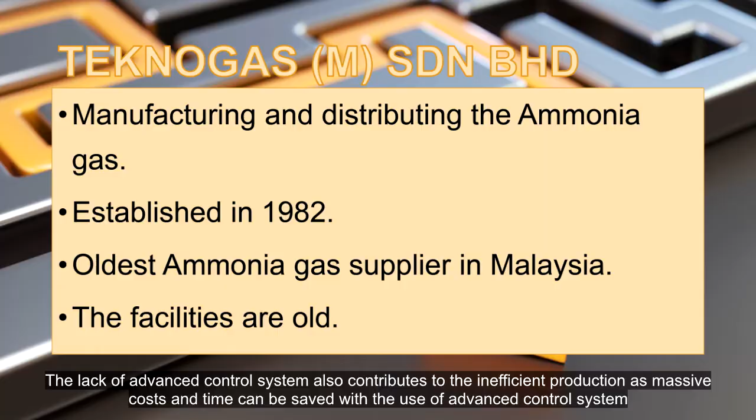However, this video will be focusing on the company's ammonia storage tank. Storage tank is considered as one of the most crucial equipment as the end product is kept and stored in the storage tank for a period of time. The control engineering department suggested the company to do a replacement of old storage tanks with a new one. There are several reasons why the replacement should be done by the company.

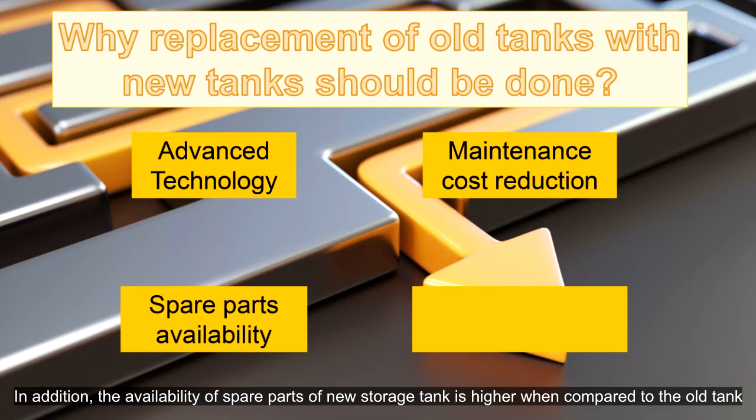Firstly, this replacement will ensure the company has the most advanced technology. The maintenance cost will be reduced as the value of desired operational condition parameters like temperature, pressure and flow rate can be redesigned. In addition, the availability of spare parts of the new storage tank is higher when compared to the old tank. Furthermore, the new proposed tank is more environmentally friendly as it produces less pollution and waste.

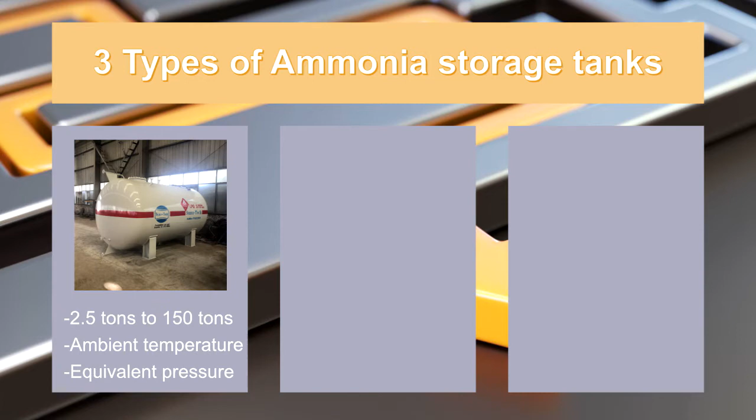The Control Engineering Department has shortlisted 3 types of ammonia storage tanks. The first one is the smallest one as it can only store 2.5 tons to 150 tons of ammonia. This storage tank operates under ambient temperature and equivalent pressure. The second storage tank is the medium-sized storage tank that is applicable to keep 500 tons to 3000 tons of ammonia. This spherical-shaped storage tank requires a refrigerator system as ammonia will be kept under pressure.

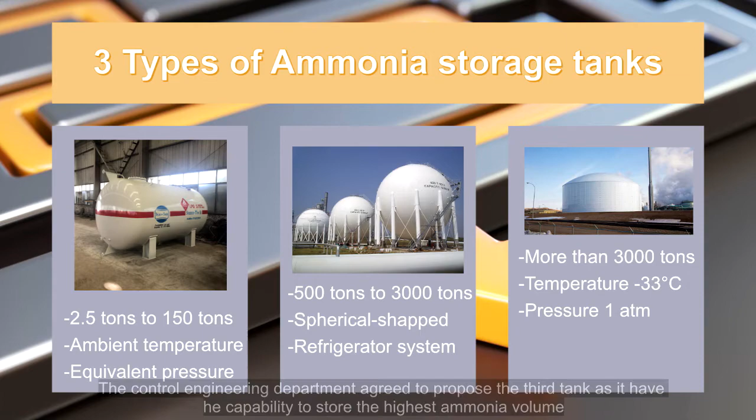And the third tank is the biggest ammonia storage tank that is suitable to store produced ammonia of more than 3000 tons. A refrigerator system will be used to reduce the ammonia temperature to -33 degrees Celsius. This storage tank will be operated under atmospheric pressure. The Control Engineering Department agreed to propose the third tank as it has the capability to store the highest ammonia volume. The biggest storage tank, which is the third tank, is required as the company produces a huge amount of ammonia.

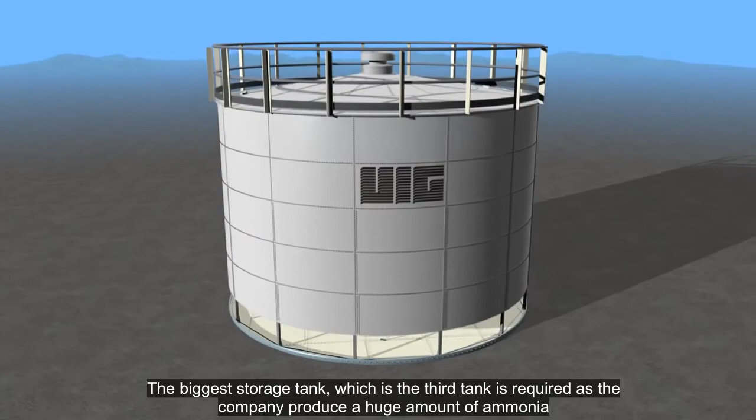And now, I will be presenting part 1, variables involved. In this part, we are going to discuss the variables involved in the storage tank. The operational condition of the storage tank needs to be properly controlled as we do not want any negative changes to happen to the end product. There are 3 variables that we need to control in the storage tank, which are temperature, pressure, and flow rate and level. So the first one is temperature.

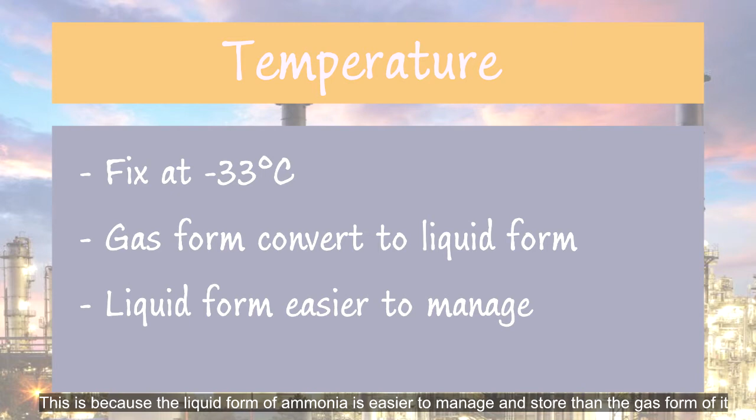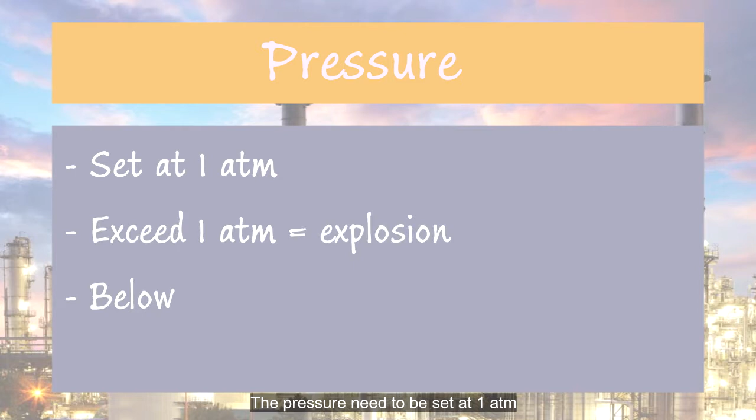The temperature needs to be fixed at -33 degrees Celsius. This temperature is required as the ammonia in the form of gas will be converted into the liquid form. This is because the liquid form of ammonia is easier to manage and store than the gas form of it. The next variable that needs to be controlled is pressure. The pressure needs to be set at 1 atm. This control is crucial as an explosion can occur if the pressure exceeds 1 atm. If the pressure is below 1 atm, the ammonia will be vaporized.

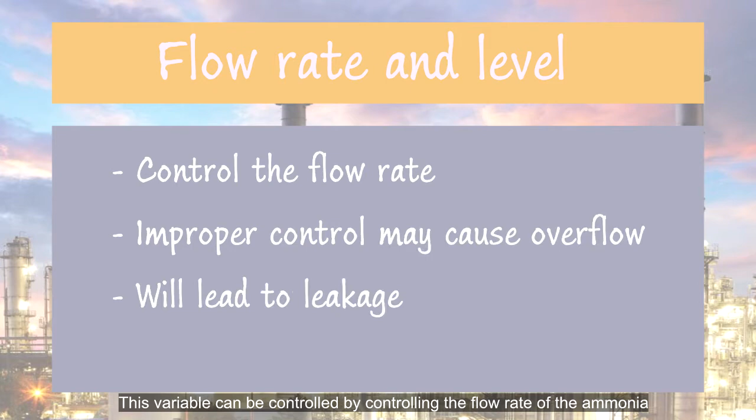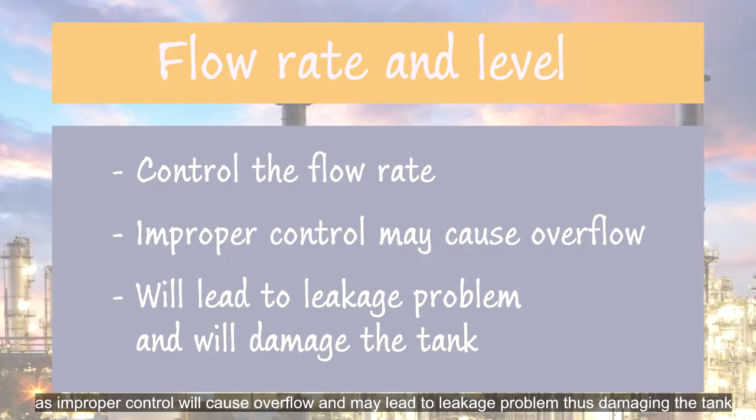And lastly, the level of the ammonia in the storage tank. This variable can be controlled by controlling the flow rate of the ammonia. The control of the level of ammonia in the storage tank is vital, as improper control will cause overflow and may lead to leakage problems, thus damaging the tank. So how to control these parameters to be at the desired value will be further explained in the next part by Luqman.

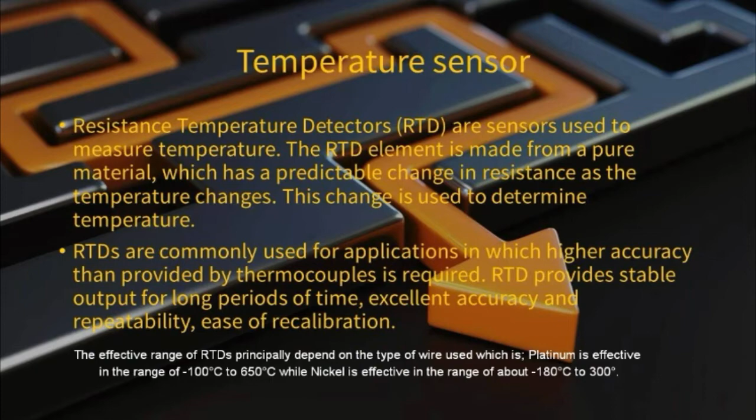The second input device is the pressure sensor. Sealed tanks such as ammonia storage tanks are required to be sealed from the atmosphere. Under this condition, a differential pressure gauge should be used to calculate the difference in pressure. But due to the corrosive nature of ammonia, it should be protected by a material that is suitable for ammonia use. The pressure gauge should also be able to withstand the pressure.

The suitable pressure sensor for ammonia is the digital bellows sensor. It is sealed at one end with a small hole at the other. When pressure is applied via the hole, the bellows expand. This displacement can be calibrated in terms of pressure. The electrical output signal is directly related to the displacement input signal.

The third input device is the volume meter. Pure ammonia is stored in a pressure vessel rated to 250 to 300 psig. Aqueous ammonia, 70% to 80% water, is stored in a tank rated for 25 to 30 psig. Storage requirements for aqueous ammonia are 3 to 4 times that of pure ammonia. A level measurement device for ammonia storage tanks must be able to withstand pressure and still measure accurately.

Plus, the surface of the fluid tends to boil as it moves between states, and heavy vapors can affect measurement accuracy. Radar-based sensors, on the other hand, are ideal because low-frequency radar devices are less prone to attenuation and better suited to many ammonia applications.

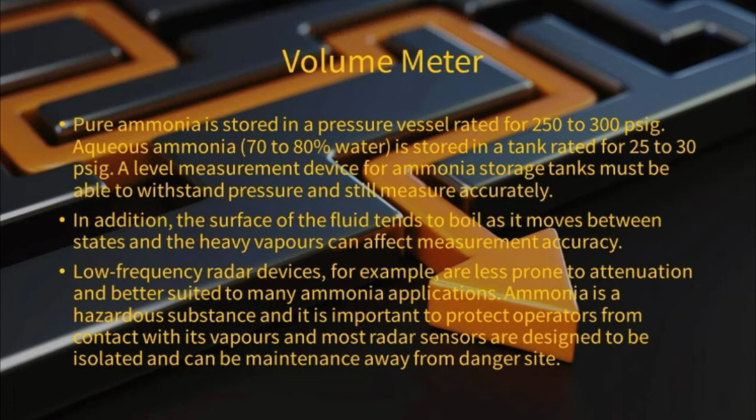Ammonia is a hazardous substance, and it is important to protect operators from contact with its vapors. Most radar sensors are designed to be isolated and can be maintained away from danger sites.

Now we will move to the last part, which will also conclude our assessment. This part will discuss the system that we have chosen for our company. We need to bear in mind that we are buying a new storage tank for our company. It is important to get a tank that can store ammonia liquid in a condition that will not harm the surroundings and worker safety. As we all know, it can cause explosion without proper storage.

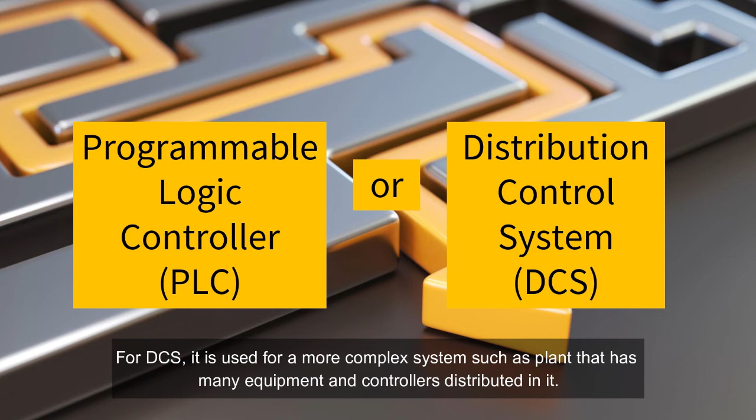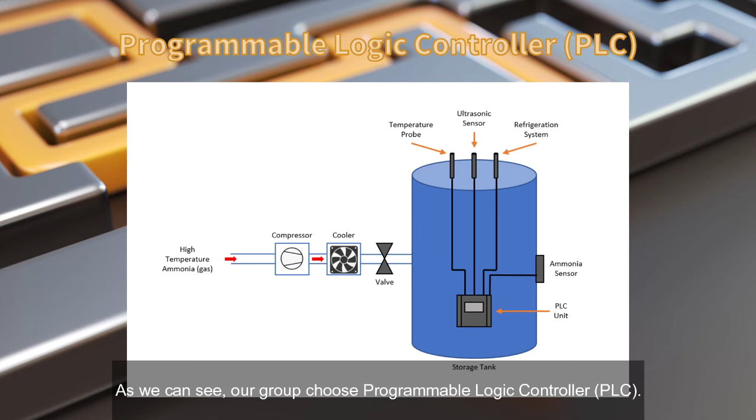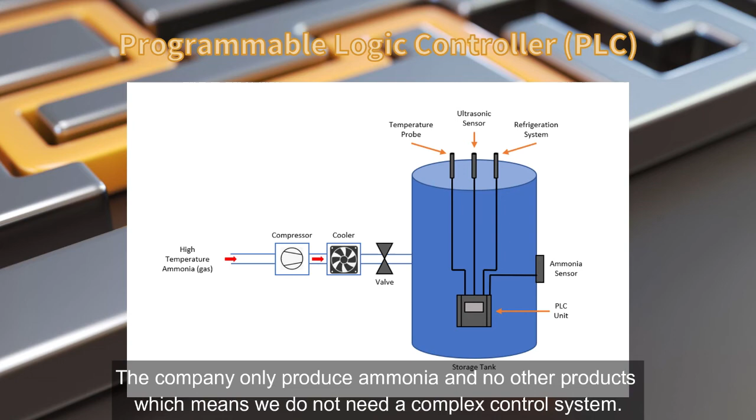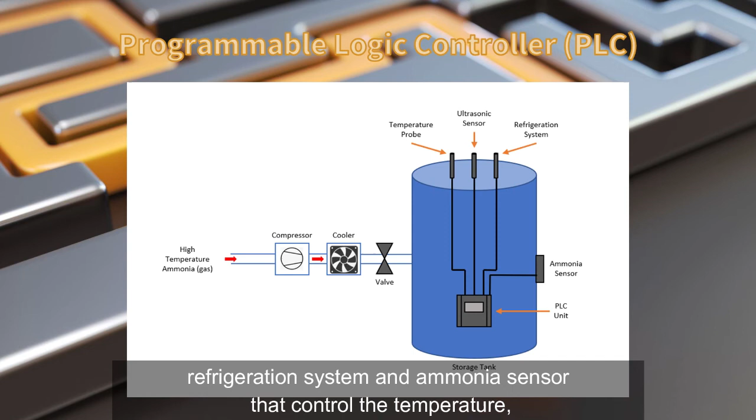As we can see, our group chose the Programmable Logic Controller (PLC). The reason behind this choice is that our company has a simple and easy-access plant. The company only produces ammonia and no other products, which means we do not need a complex control system. There are four devices attached to the storage tank: temperature probe, ultrasonic sensor, refrigeration system, and ammonia sensor, which control the temperature, level, leak detection, and cooling purpose respectively.

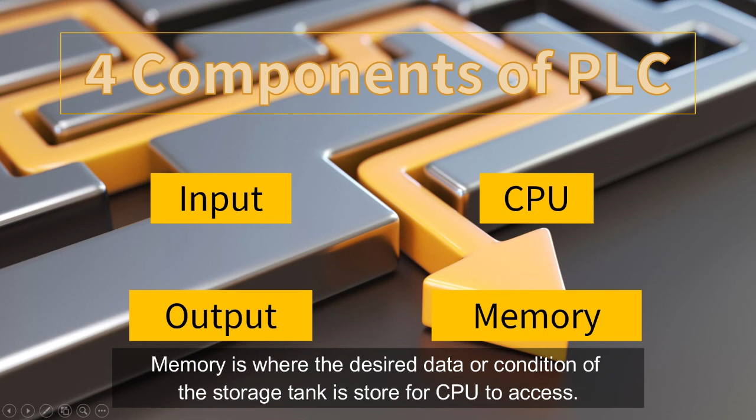Now we will go further into PLC. There are four main components in PLC: input, CPU, output, and memory. Input represents the sensing devices that will sense any changes in the storage tank. CPU is needed to analyze the input and transfer it to output. Memory is where the desired data or condition of the storage tank is stored for the CPU to access. Lastly, output represents the devices, such as valves, that will regulate the condition of the tank.

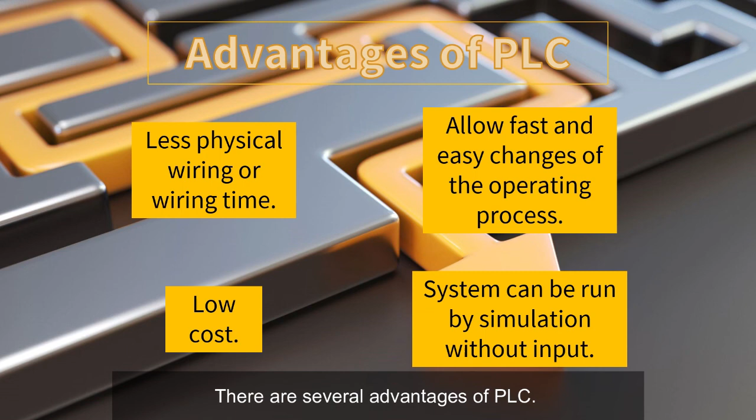There are several advantages of PLC. Number one, it has less physical wiring or wiring time, because the controller is placed near the equipment. Secondly, the cost is lower compared to DCS. PLC also allows changes of conditions in the reactor to occur immediately during the operating process, as it works everything by itself with the data stored in memory. Number four, the system can be run by simulation without input, which can help detect any unusual activities or potential hazards that can happen during the real operating process.